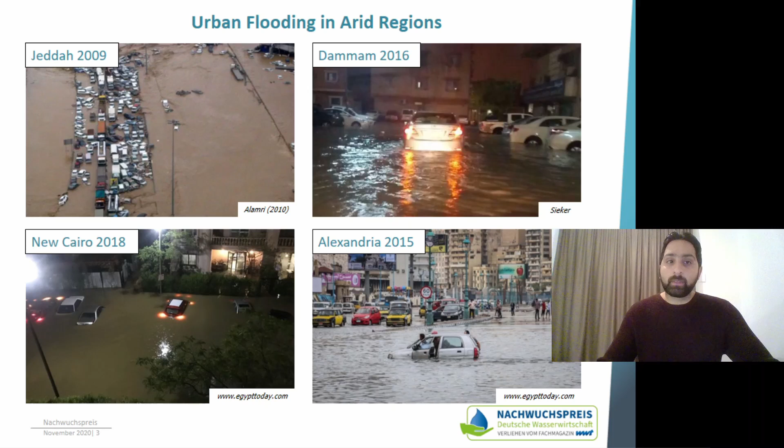Usually there is no flooding mitigation or stormwater drainage systems, and even if they exist, they have blocked inlets or big sedimentation inside the pipes due to the long dry seasons and strong sandy storms.

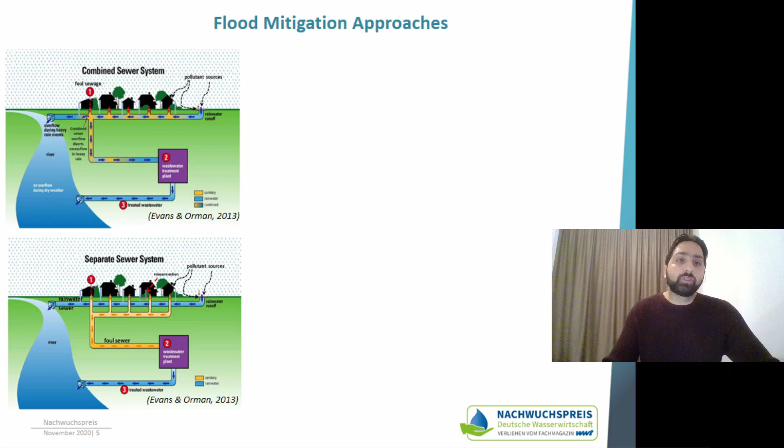Now, what is the main concept adopted in the study? Usually we say the main approach used for flood mitigation in the arid regions is using the stormwater network, either the combined one or the separate ones. However, these kind of systems have some problems called end-of-pipe problems, which means we accumulate bigger volumes of runoff, high flow peaks, and more amount of contaminants at one location at the end of the pipe of the system. Then we have to solve a big problem, which is expensive.

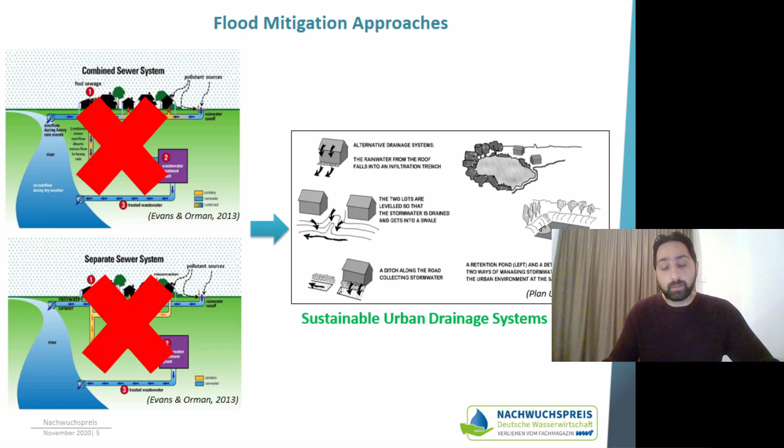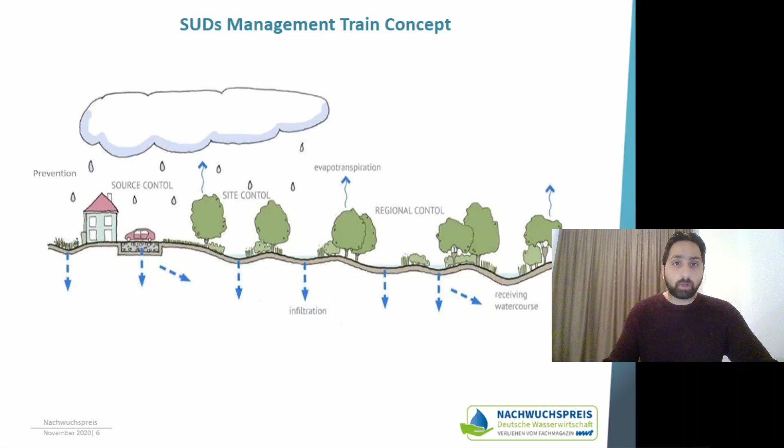However, if we apply the sustainable urban drainage systems, or so-called SUDS, which are decentralized systems or measures which aim to deal with the stormwater runoff on site as much as possible through several steps like prevention, source control, site control, regional control before going to the disposal point or the receiving water course, we will have smaller problems to deal with, which is also cheaper. Some examples of SUDS are green swales, stormwater cisterns, tree pits, permeable pavement, permeable asphalt, and many other examples.

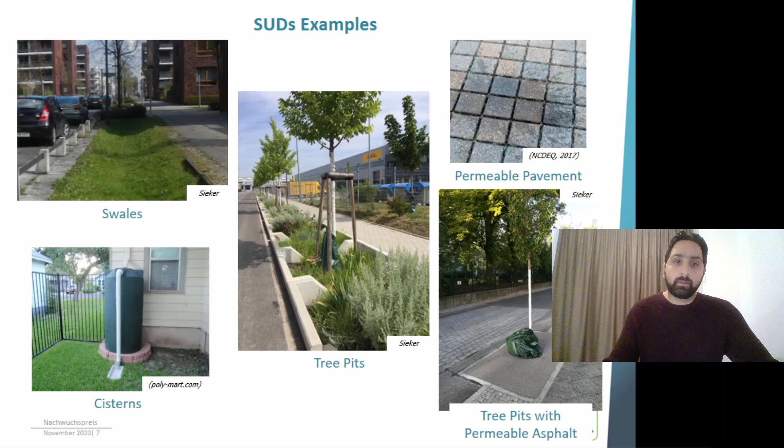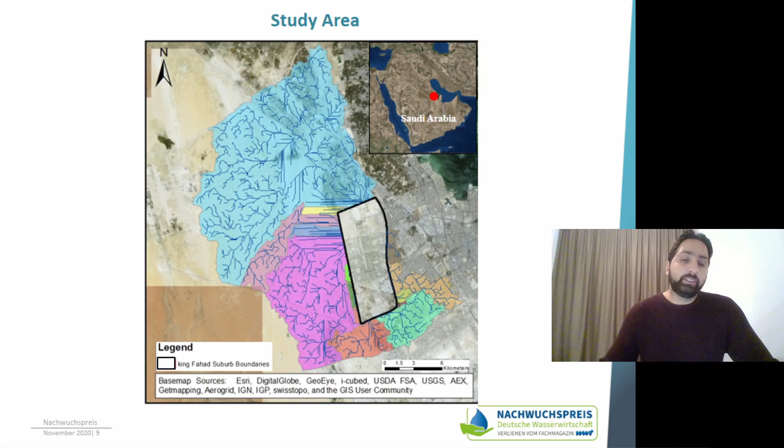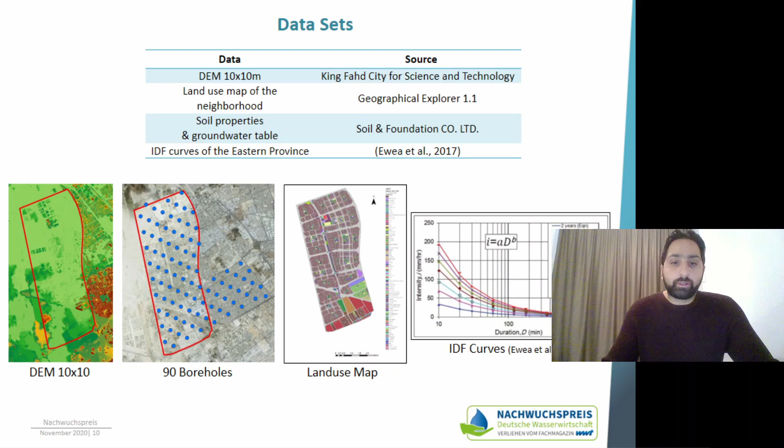The datasets available about this study area were the digital elevation model 10 by 10 meter representing topography, 90 boreholes giving an idea about the hydrogeological status of the area, land use map, and some IDF curves from the literature about Dammam city, which were used to prepare the design storm for the modeling.

Method and tools. Since we are talking about urban flooding with multi-directional waterways, the main method used for the study was performing 2D hydrodynamic modeling using InfoWorks ICM software. Also, some other software was used like StormXXL for preparation of the design storm and ArcGIS for data pre-processing.

The two main tracks of the modeling process were the base scenario to determine the basic flood condition of the area without applying any kind of mitigation measures. The second one was the mitigation scenario after implementing SUDS as flood mitigation measures to see the impact and compare the results.

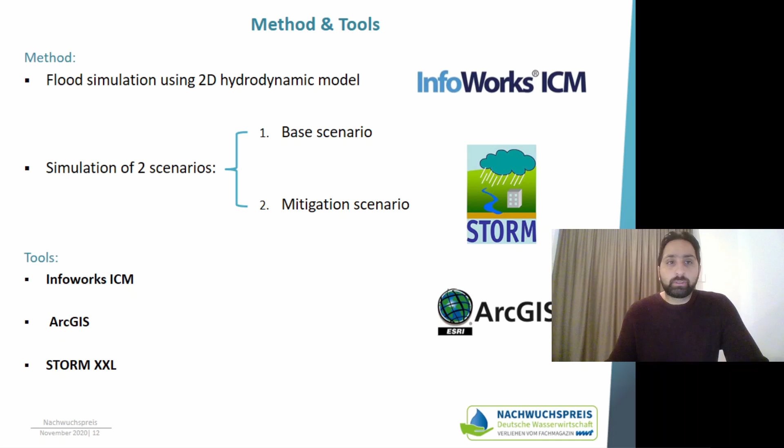The simulations were done based on pluvial flooding only, without considering the fluvial flooding, for return periods 10, 25, and 100 years, storm duration of 3 hours, and maximum simulation time of 12 hours.

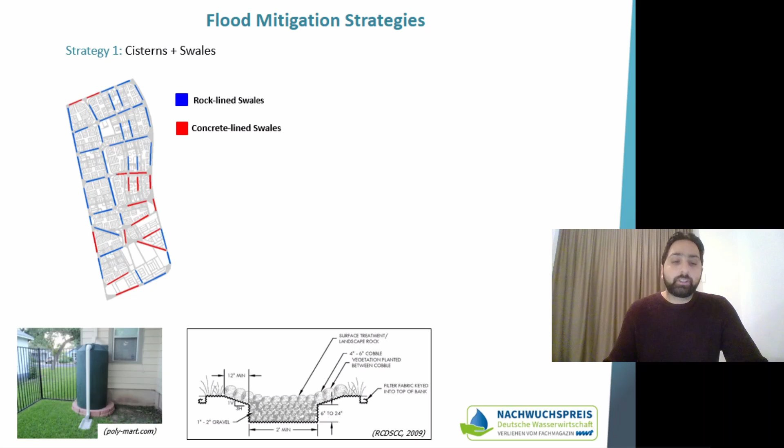For the mitigation scenario, two strategies were proposed. The first one was to apply cisterns for all buildings to collect runoff from rooftops, in addition to applying rock-lined swales in the medians of the main big roads to allow infiltration. At locations where the groundwater table was high, concrete-lined swales were done without infiltration to just store some water on the surface and allow evaporation.

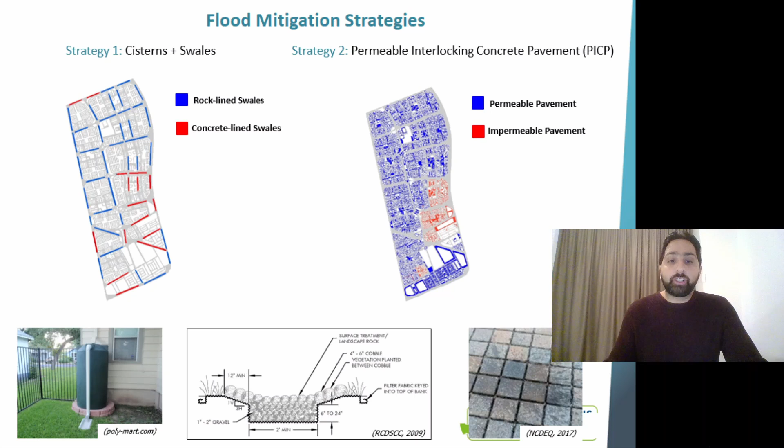The swales were applied by making or creating depressions on the mesh of the model. And the permeable pavement was applied by changing the infiltration parameters using the Green-Ampt method in these blue areas.

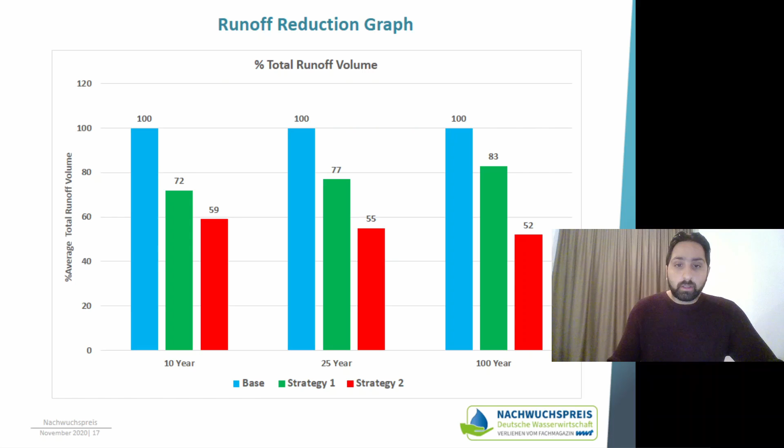As a graphical representation of these results, we can see here the total percentage and the reduction of the runoff volume. If we compare for the 10, 25 and 100 years, and if we compare base scenario and strategy 1 for the 3 return periods, we can see that reduction volumes range from 20 to 30%. And if we compare the base scenario with strategy 2, the reduction in the runoff volumes ranges from 40 to 50%.

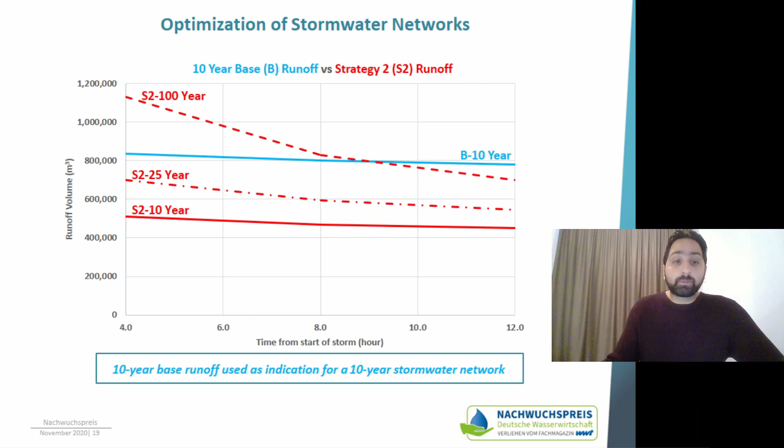For the 100-year event, and this is very interesting, the 100-year runoff volumes were reduced and even intersect with the capacity of the network. That means that we can achieve very good or acceptable mitigation levels if we apply a 10-year network with strategy 2, which is permeable pavement, even against the most extreme event, which is the 100-year event.

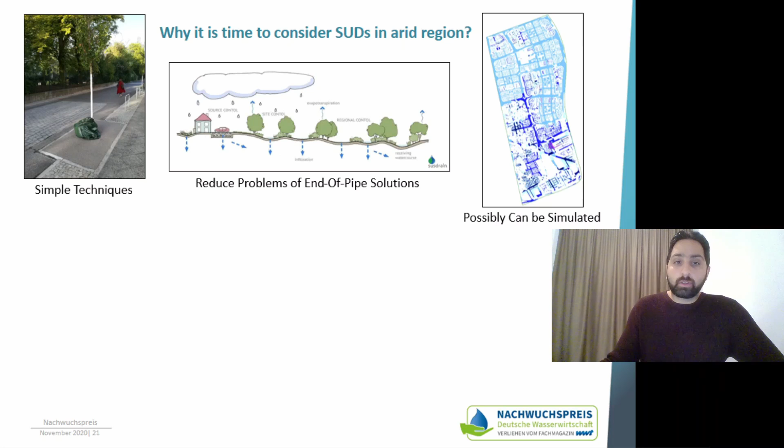So the main message from this study was to answer the question why it's time to consider SUDS in arid regions: simply because they are simple techniques, easy to construct, easy to integrate in the landscape of the cities. They can reduce problems of end-of-pipe solutions by locally dealing with the runoff waters. Nowadays they can be simulated due to the existence of strong software packages and strong computer processors.

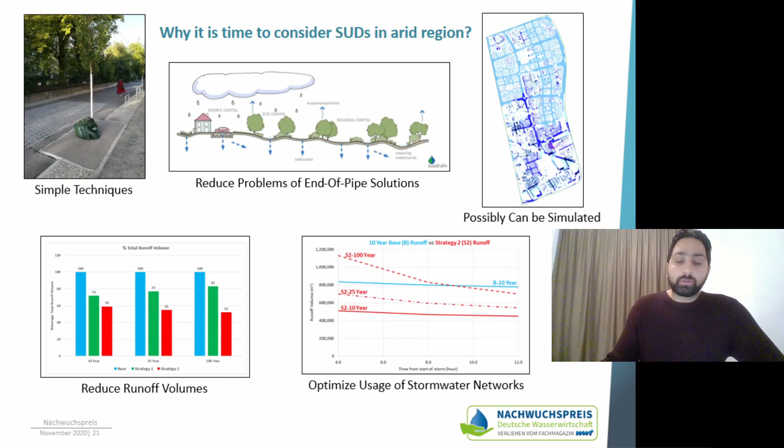The model results show that they can significantly reduce the runoff volumes within cities and urban areas, and also can lead to some optimizations in the need for stormwater networks. Here are some of the references used in the study.